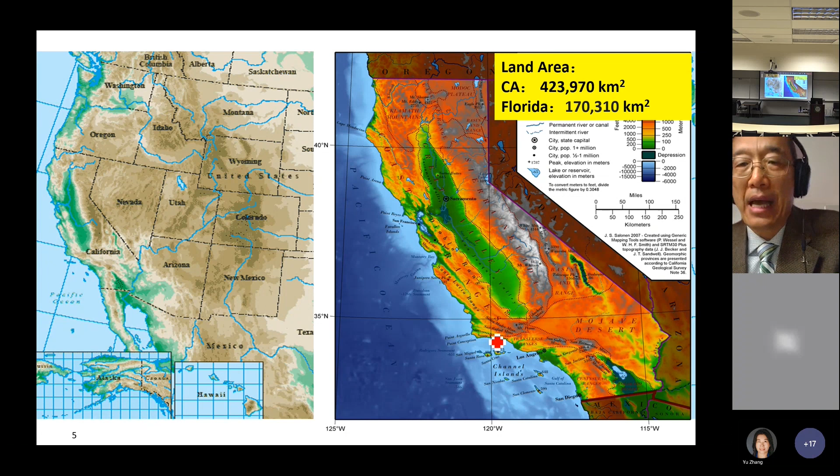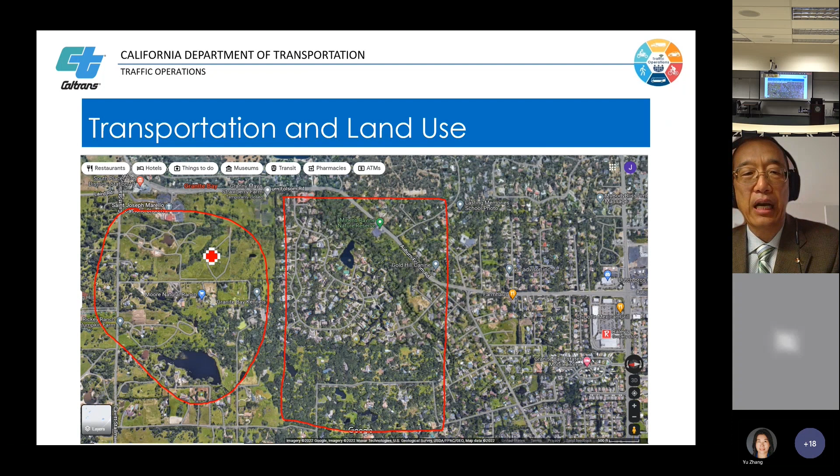So I hope you folks appreciate, because I worked with USF before, that's Professor Kristine Williams, on access management, right? So when you have a denser land use development, you will see the access points along the arterial will be a lot denser than in the low density development. I believe you folks are transportation majors, so you'll have no issue appreciating what has been shown in this picture. And here is a repeat of the low density, and here a repeat of the higher density.

So you see all these different access points, right? See, this one access point now will serve so many houses out there, as compared to the low density development. So this is the land use pattern, and that's where all the traffic got generated, right? So every morning you will see all these households send cars to the alleys and into the local roads, and then to the arterial, to lead to the freeway, isn't it?

So that's just day in, day out, like a pendulum. That's what we are talking about, the origin of all this transportation and transportation issues. That's the land use. So keep that in your mind. And not only the land use pattern, we also talk about the transportation service population.

And in California, over the last 140 years, you will see the population continue to grow all the way to about 40 million in this state. And yes, in recent years, we see some dipping in our total population or the growth rate, right? So the red line is the growth rate or the annual changes. But again, on this same piece of land, if you compare with the 1900s, we are really dealing with a lot of additional mobility needs, right?

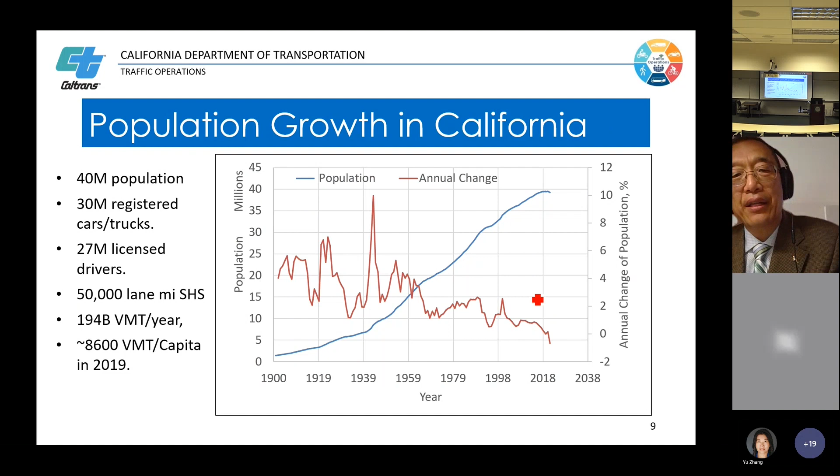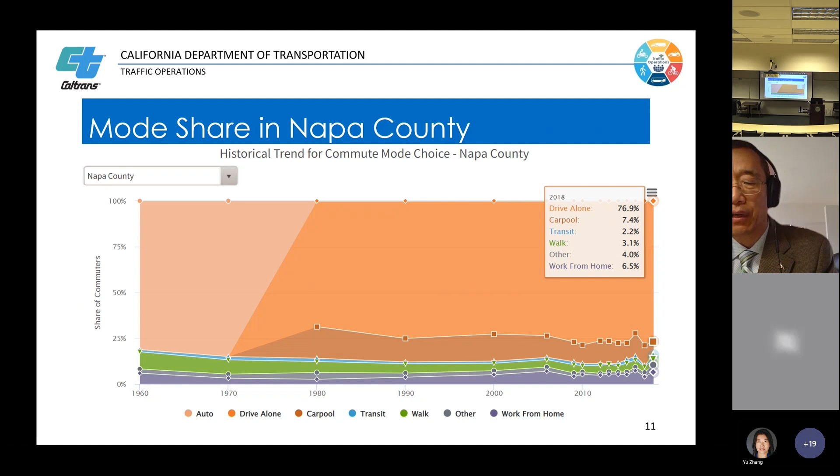Remember, in Napa County, only 2.2% are using transit. So a lot of people depend on the freeway, and that's a common theme for freeways in California. I think it's probably the same in Florida, very much congested, and you see the congestion or the delay continue to grow. This is the chart in California, okay?

Although population grew in the last 20 years by 13%, traffic delay grew by 28%. So all these things are really commonplace for you folks to understand. No issue. I don't think that we have any issue.

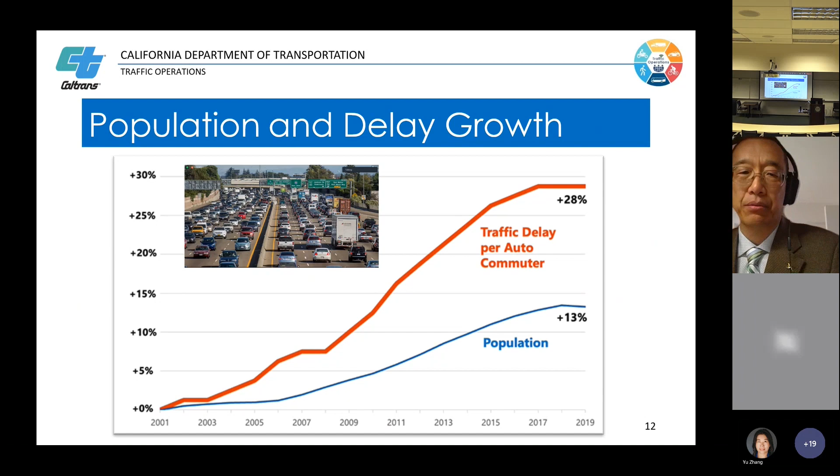So that's the situation. Again, I want to chime in a little bit on the historical perspective. We have tried to deal with the congestion or the delay issue, especially auto delay, by building additional roadway infrastructure. This trend has taken place ever since the 1700s. At that time, you see Junipero Serra, the first Spanish missionary in the California area. At that time, in the 1700s, transportation was walking or wagon, right?

Or animal-drawn carts. But after the automobile came into being, especially after Henry Ford, we have mass production of the Model T cars. All of a sudden, we have seen a lot of additional cars out there because everyone can afford a car, especially in the 1900s, right? And that pushed the infrastructure construction, I say, fever. That is a fever, especially in the 1940s.

And then from 1940 to 1969, this country really ushered in a highway era. I tell you, at that time, in the city of LA, they had a grand plan of putting in freeways every 5 miles in the city grid. So correct me if I got this number wrong, but that is the highway era, especially combined with, after the Second World War, the 1956 Eisenhower interstate system we see today, right? You will see a lot of additional freeways got constructed.

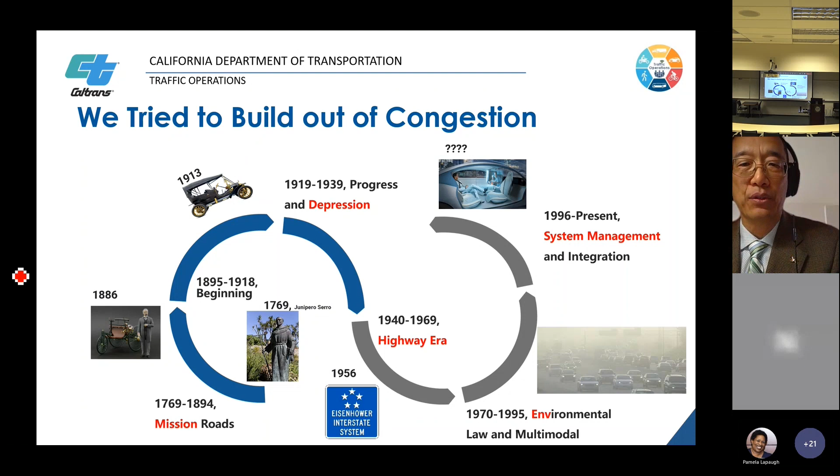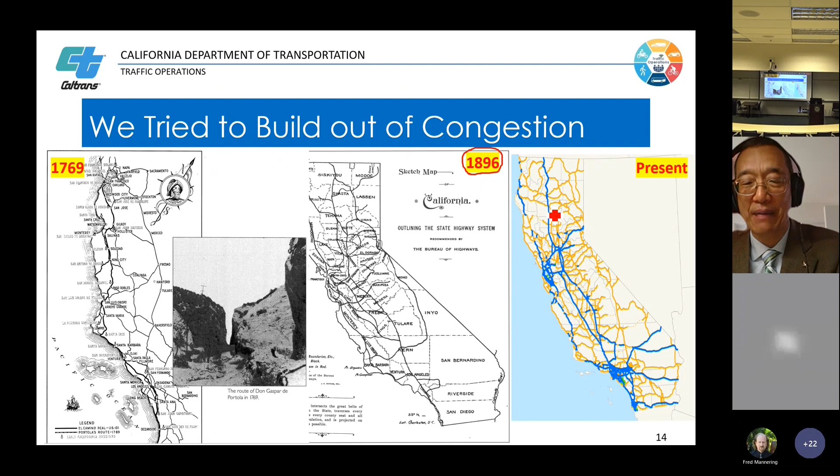And then by 1896, when Caltrans came into being, we started to develop the statewide highway plan. We started to move the freeway to the Central Valley and to the foothills of California, right? And the rightmost picture is today's situation. You see how much we have developed, especially putting in all these freeway systems, like the arterials. So we tried to build out of congestion to satisfy our transportation needs.

However, when you talk about the San Francisco Bay Bridge, I'm not sure how many people have crossed that bridge. At the beginning, in the 1940s, when the bridge first opened to traffic, the top layer was reserved for light rail cars or transit use. It wasn't developed for cars. However, when you travel today, both the lower deck and the upper deck are fully occupied by automobiles. I just didn't see much transit use at all, right?

Yes, we tried to build out of congestion, and we had a good intention at the beginning, to encourage transit or multimodal travel. However, cars took them out because it's...

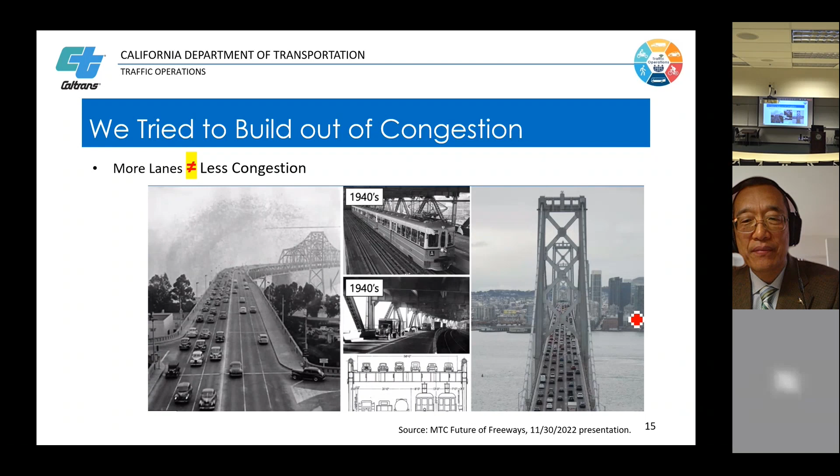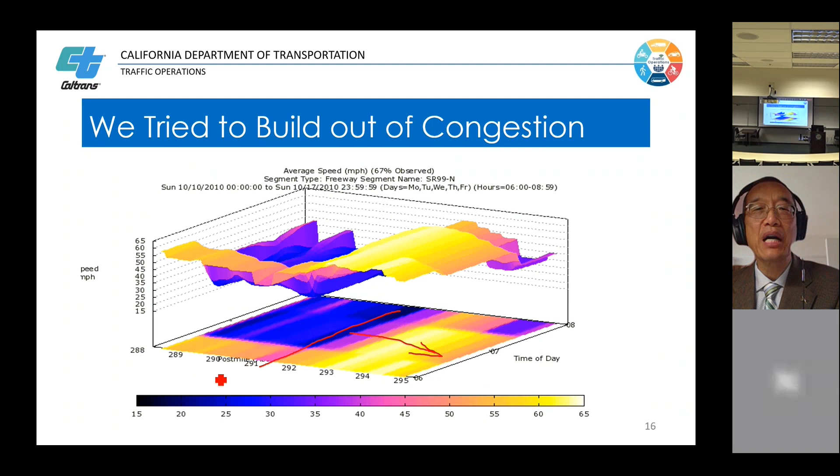So we tried to add an auxiliary lane out there to relieve this bottleneck, and this is what happened after we constructed the aux lane. After we built additional roadway capacity, did we really eliminate the congestion? Again, no. We only managed to push the bottleneck downstream. If you compare these two pictures, we pushed the bottleneck downstream, and that's it. The congestion still remains. So again, we tried to build out of congestion, but I don't think we did.

An additional challenge is climate change. You already learned about the California wildfires and sea level rise. I think Florida suffers from sea level rise too, right? These can also be attributed back to transportation, because transportation gives a lot of emissions, causing GHG and contributing to climate change. So that has been another concern of our transportation community.

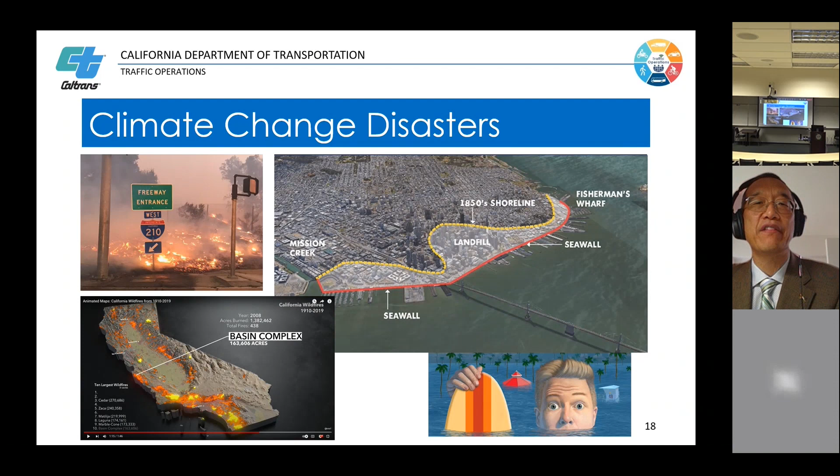And the other side of the story, something new for transportation: previously, we only thought transportation was to make people travel faster, and that's not true. Transportation also has social value. These freeways are wide, big, and grand looking. However, they favor travel by automobile. They favor driving. When you talk about favoritism, you have equity concerns, and that's the social value. And all this freeway construction is also severing our communities, right? You might also be separating farmers from their arable lands.

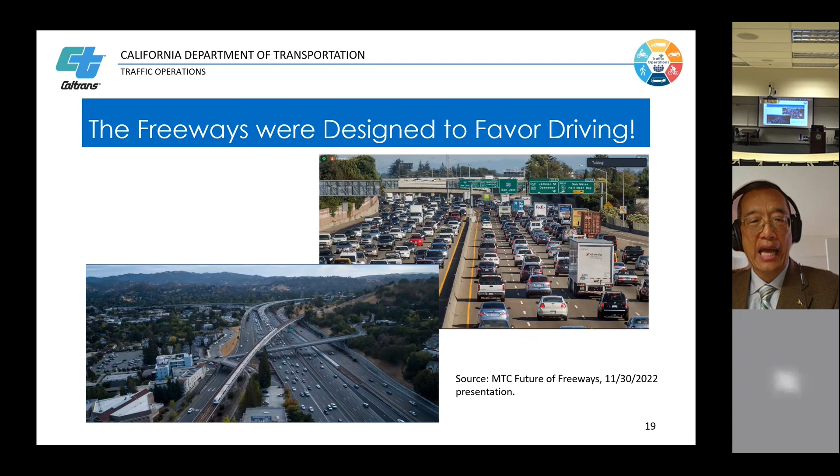Their field, things like that sort. And then this is a picture from the city of Oakland in California. This is not my slides, okay? So I stole it from MTC, Metropolitan Transportation Commission.

When you're thinking about one of our freeways' route choice, this route was selected going through all those red colored areas. Remember, all those red colored areas are really kind of cheaper land. See that all these areas are kind of cheaper lands. And then it happened to be occupied by the poor most of the time. All right. So you will see again and again, transportation site selection has not been as equitable.

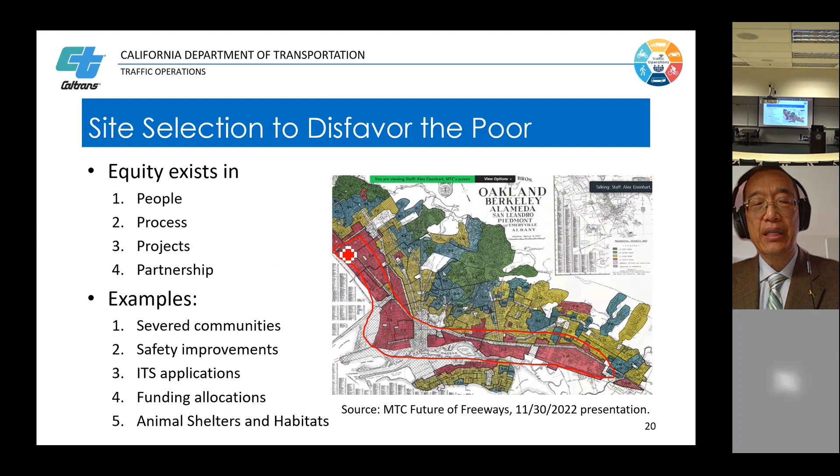Okay. When you talk about equity, when you talk about the transportation social value out there, we need to kind of redevelop. We need to change our practice. Okay, so I do not want to explain to you what equity and inequality really is. I will encourage you folks to really check online, watch YouTube, what equity really is, and why transportation facilities, as of today, are not fully considering all these different community needs, especially the equity needs.

For example, if I want to ride my bicycle, I will feel the freeway system probably is not an equitable investment, right? So I will stop there. But I think in California DOT, we really acknowledge the past. We want to correct now. In all of our facilities and investments, we will consider equity.

I can tell you right now, I'm developing a policy on managed lanes or on HOV lanes, high occupancy vehicle lanes. We are considering specifically the equity issue. We are being required to perform an equity analysis for our investments so that we can prevent any future occurrence of all this inequitable kind of development.

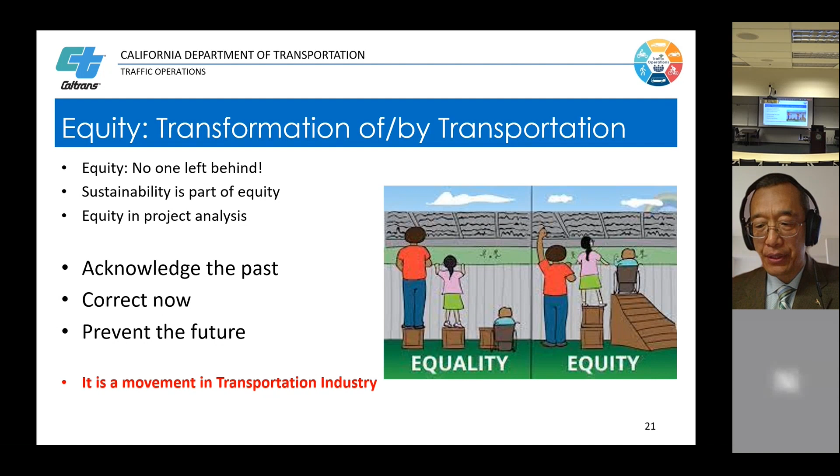Then how about the next steps? We've already seen we have the land use pattern, we have the mode sharing, and we have all these inequity issues out there. What will be the next step? The basic conclusion from us will be, congestion cannot be eliminated. And sometimes congestion might be even a good thing, I tell you. You don't want to build a road with no cars traveling, with no people using it, right?

So congestion cannot be eliminated, especially during the peak time. That's when we design our highway system, right? Remember, you use the 30th hour. We allow for 30 hours of delay out there or exceeding its capacity, right? So it is not designed to have no congestion to begin with. And then experiencing some congestion is okay. We feel it's okay, all right?

And the goal of transportation is really multifaceted. It is about people. It's about equity. It's about quality of life, and then the economy and sustainability. It's not just about moving cars from point A to point B. It is about moving people from point A to point B. That's the difference, all right?

And then the next step, we probably need to think about, are we going to continue to pour more concrete to solve our transportation issue? Or should we start to think about changing people's behavior in trip making? Because when people start trip making, they should have some additional mode choices out there. Can I ride the train? Can I bicycle? Can I even walk to save a solo driving trip, right?

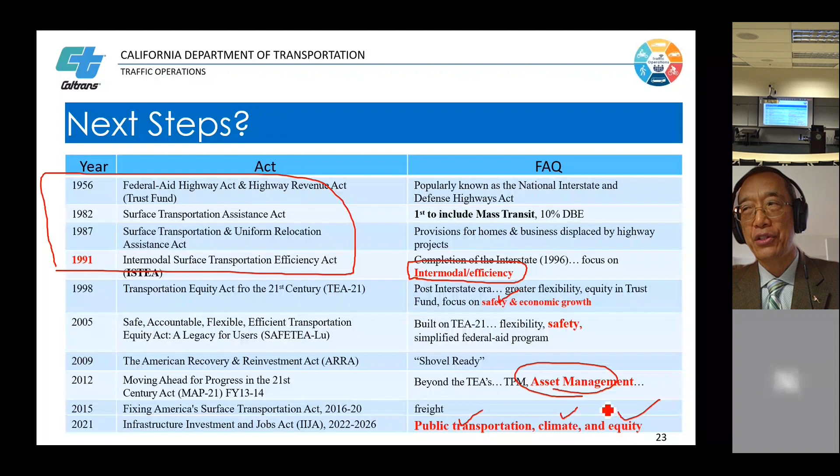So that's the political side, the funding side, the next step. Think about these three or four points and you'll really see what I'm trying to say. That's the change, that's the shift. And we need to change and shift starting from our classroom, probably. Everything from construction to performance, all right?

I think I have used about 33 minutes now. I will try to be quick to talk about the challenges and solutions and what's happening in California, to answer Dr. Lu's focus. Dr. Lu, here is the first challenge and solution. We have the carbon challenge, the environmental concern. And then there's the California solution I'm going to talk about.

Transportation emits about 49 to 50% of all greenhouse gas in California. In California, the solution is threefold. One is the fuel standard change. We made it way stricter for low carbon fuel, things like that, to reduce GHG emissions. We also ushered in the electrification era. Everything we want to electrify.

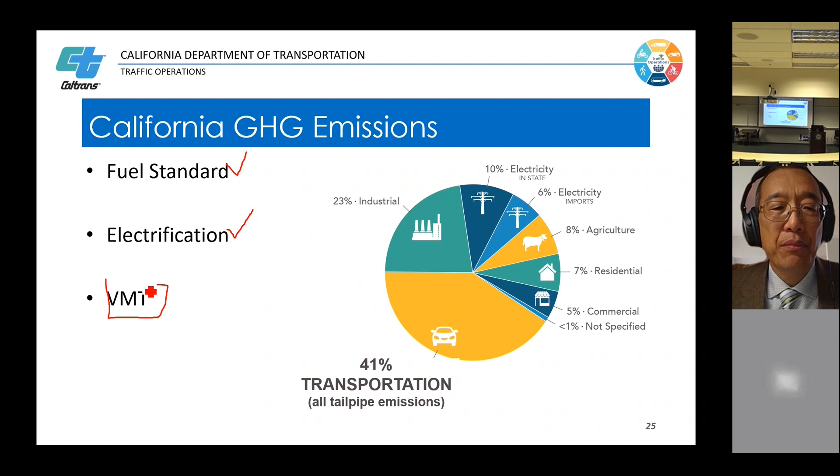And the third piece is vehicle miles traveled reduction, VMT reduction, because to reach California's GHG reduction goal, the first two, electrification and fuel standards, will not be sufficient to live up to the 2035 and 2050 carbon neutrality goals in California. So we must add the third piece, the reduction of vehicle miles traveled by our roadway users. So that's the focus.

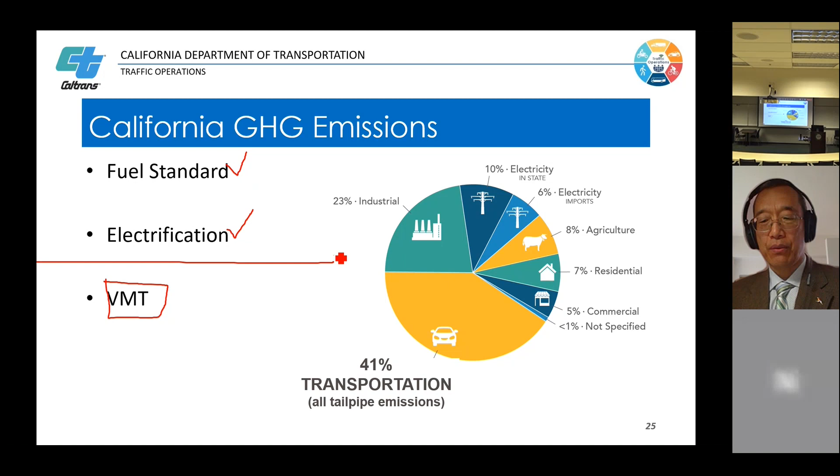I have done a little calculation. Every vehicle mile traveled is worth about 32 cents. It's very, very costly, folks. And every vehicle mile traveled, if you just drive a Toyota Camry, you are going to give out up to 2/10 of a cubic meter of GHG. That's 363 grams. I want you to double verify me; this is my personal calculation. Based on our PeMS system, VMT is costly. That's the message I want to give you all.

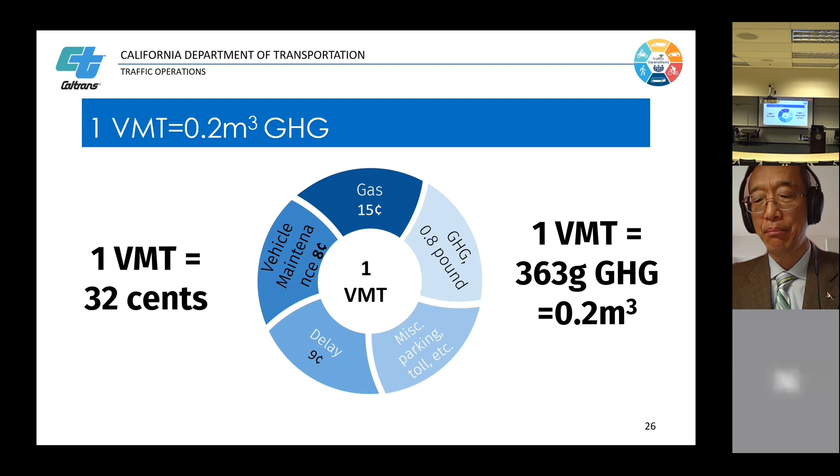And this is the goal of California. You see the black dotted line, that's our goal. And the red line is the California VMT, where we are.

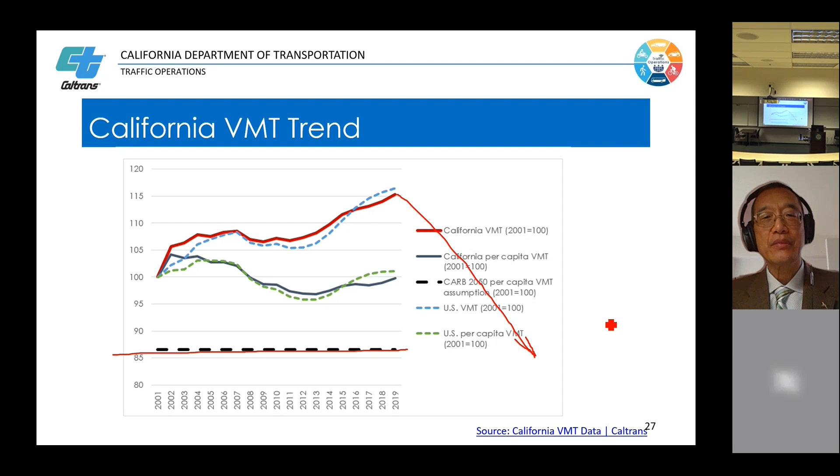And if you're thinking about 2030, 2035 and 2050 to reach this goal here, we still have very much a long way to go to reduce the per capita vehicle miles traveled. Right. So that's our challenge now. That's our challenge. Really, the goal asks a lot.

Then in California, in 2013, we issued Senate Bill 743. Okay, the basic logic is this. On the left-hand side, you folks see what you do during Black Friday. You rush into the store and take advantage of the sale, isn't it? Because the sales season starts, the holiday season starts. Okay, and the same thing happens for transportation.

When you see all this congestion here on the freeway, right? The old way for a DOT to deal with the situation is to project the traffic volume into maybe 2030, and then we start to provide additional facility like the yellow band and the green band, right? So that's what we'll do. We call it predict and provide. We predict the traffic volume growth, and then we provide.

However, after you provide the green band and the yellow band here, you make the freeway wider and bigger and easier for people to travel. You create a situation like the Black Friday situation. Basically, you are offering transportation at a sales price. If you're driving solo, hey, the DOT is going to build more road for me. I'm going to drive, take advantage of the sale, isn't it?

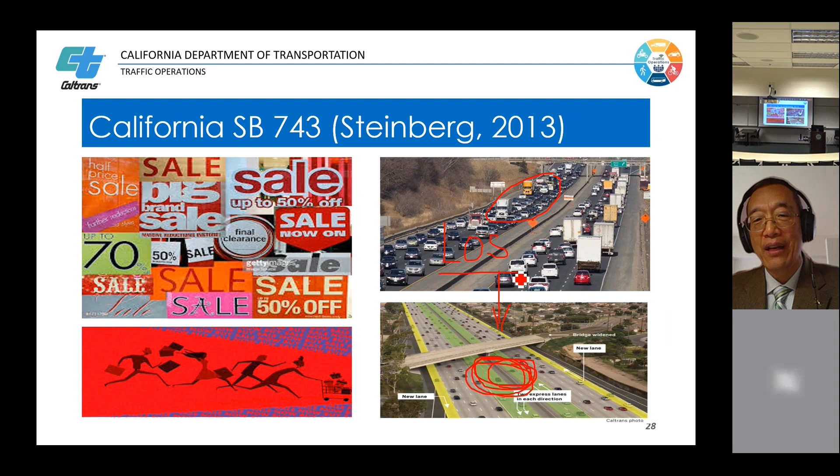So the law says you cannot use that as the basis to expand your system, because this is the evil cycle once you consider the induced piece of the VMT. So it has been shown in this chart as the microeconomic principle here. You do have an elasticity. Once you reduce the travel time, you make your roadway a lot easier to travel, you are going to induce additional demand.

How are we going to implement that law in California? We have a Climate Action Plan for Transportation Infrastructure called CAPTI, an initiative. Basically, with all transportation funding in California, we are going to invest in multimodal, in technology. We are not going to expand our capacity, or we are going to consider SB 743, consider induced travel when we expand our capacity. You have to basically mitigate the additional VMT that will be induced.

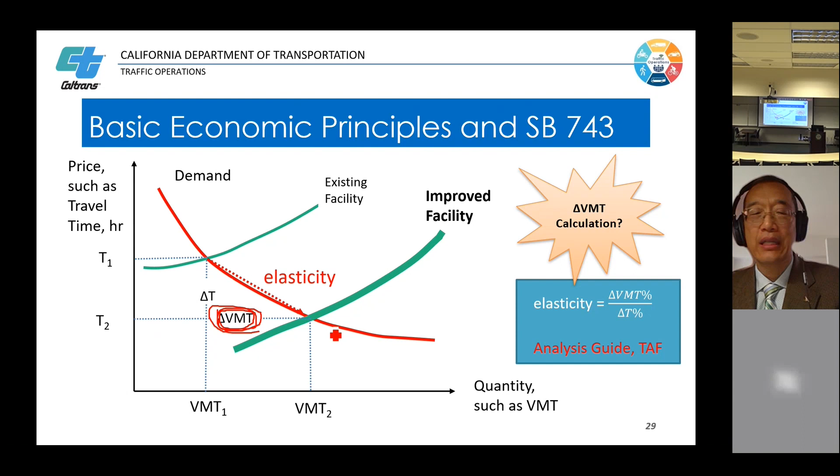Listen to me carefully. You only mitigate the delta VMT piece; the delta VMT will be something additional out there when you expand your freeway system. All right, folks. So that's how we are implementing to reduce the VMT piece, one of the three actions to consider carbon neutralization and to live up to, remember the black dotted line out there, the per capita VMT goal. All right, so this one I already talked about.

So basically, in California, according to our department's commitment and also SB 743, we changed the performance measure for our projects, especially in the environmental clearance process. And this impact is huge. It does carry equity connotations. It does carry sustainability connotations, because we are purposefully investing to consider the planet and sustainability, right? And the performance measure change definitely has a lot of implications for you folks out there developing the analytics, environmental clearance analytics, right?

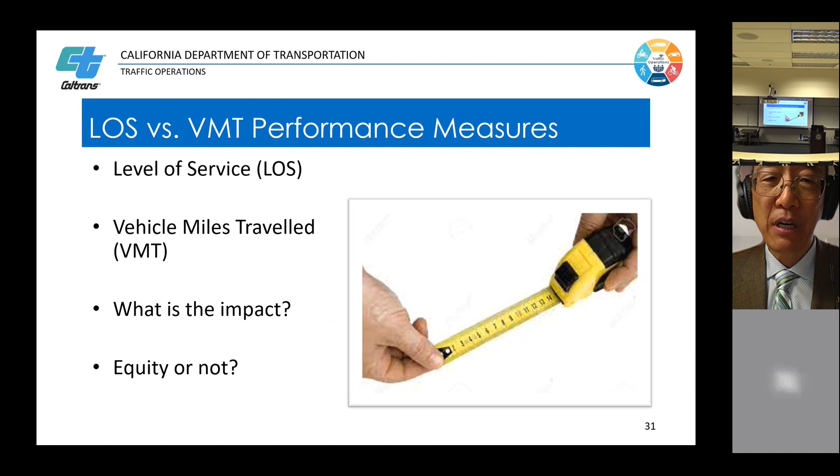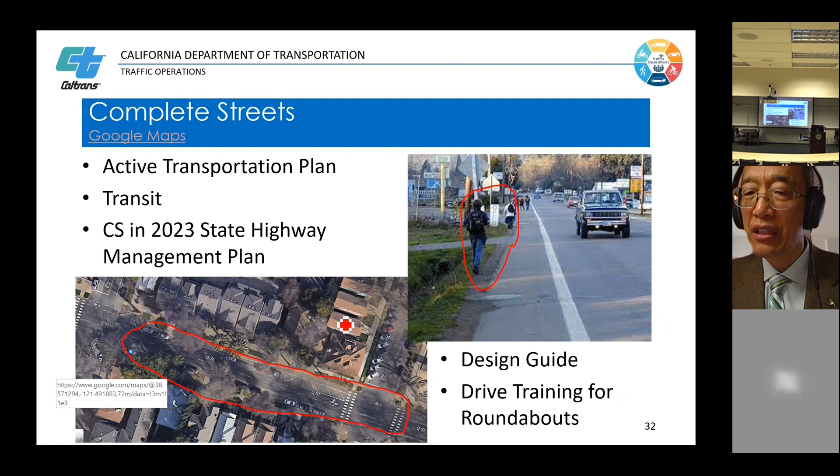Like in DC, I've been to DC last year 4 times. Each and every time I was so impressed by the complete streets development, by the roadway cross section rearrangement, thinking about multimodal use. Okay, bus on shoulder, that's what we're doing also. We talk about managed lanes, right? Managed lanes offer you an additional way of travel. You can pay for that, right? You can carpool to kind of save the empty seats in your car, isn't it? So that's what we're doing.

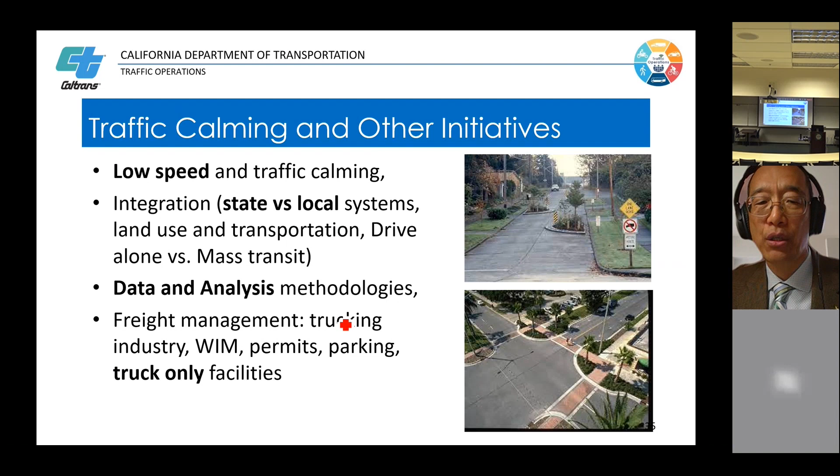We're also doing a lot of traffic calming, thinking about the safety side. Especially in previous years, decades, a lot of the traffic calming didn't happen too much on the state highway, right? Not the case anymore. On the state highway, we're thinking about favoring the different modes. You have to calm down the traffic, reduce vehicle speed to make sure traffic safety goes hand in hand with all these initiatives.

Last year, I had an initiative, I call it, to develop mobility hubs. In fact, these hubs are basically the existing park and ride lots. In California, we have 222 of those. And we feel if we develop those hubs and use those park and ride lots as the joint point between the state and the local system, we can offer a seamless connection for the mode transfer. So we can encourage even bicycle use or pedestrian walking, and connect with the managed lane system especially, right? So this is the mobility hub.

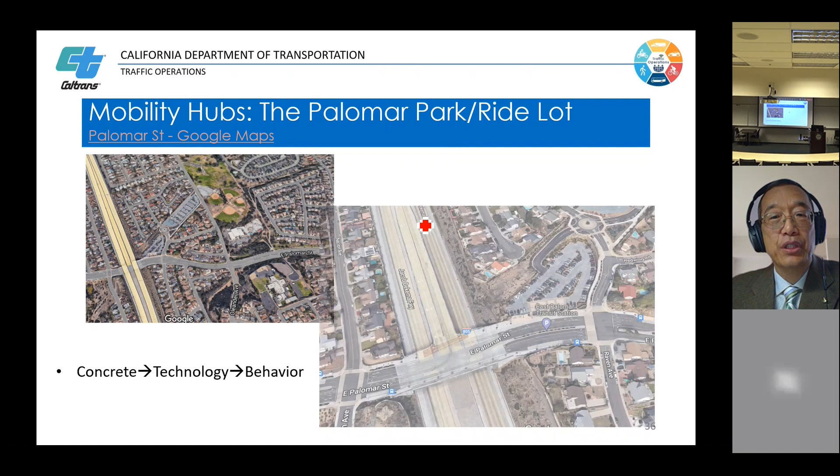I don't have the time to show you, but like I said, I will leave this slide deck with your folks so they can check into our Palomar Park and Ride lot as a sample. That lot really connects with the freeway management system through the local arterial, and then you put in these lots additional new amenities, including electrification, solar panels, EV chargers, bike lockers, ADA parking spaces, and then transit stops or BRT, bus rapid transit stops out there.

So basically, we're trying to use the hub to integrate multimodal at one place and make it a seamless experience to attract additional multimodal travel, to alleviate the solo driving, to improve the transit use. All right, and this mobility hub initiative also re-emphasizes my point: not to pour too much additional concrete, but to focus on people's behavioral change.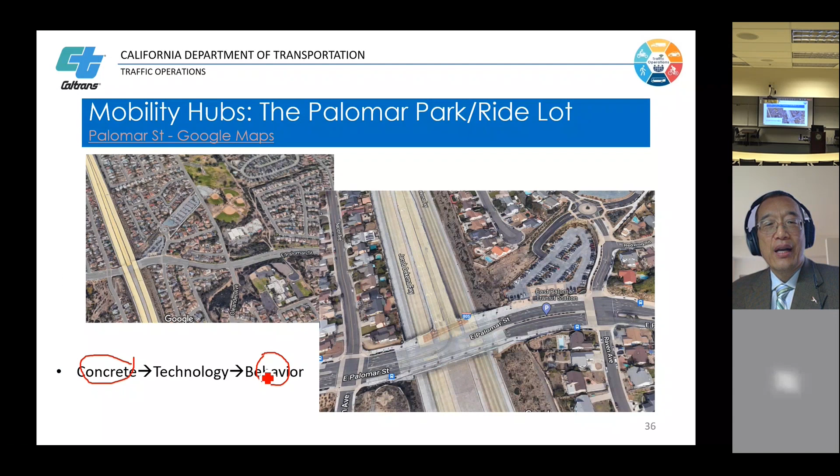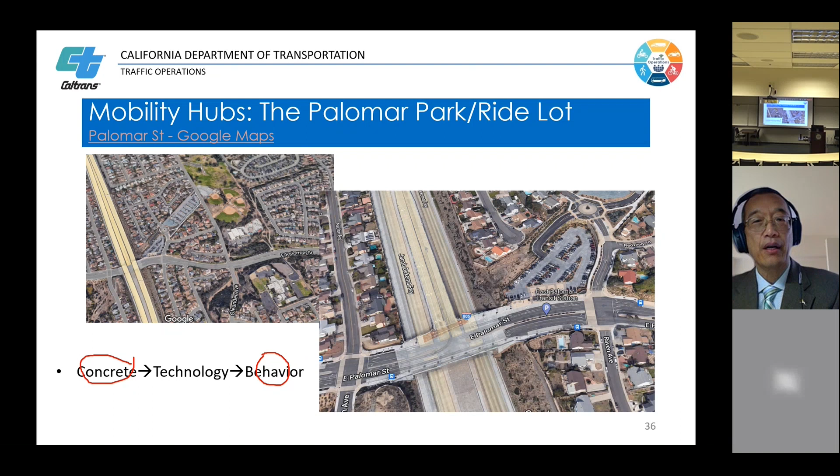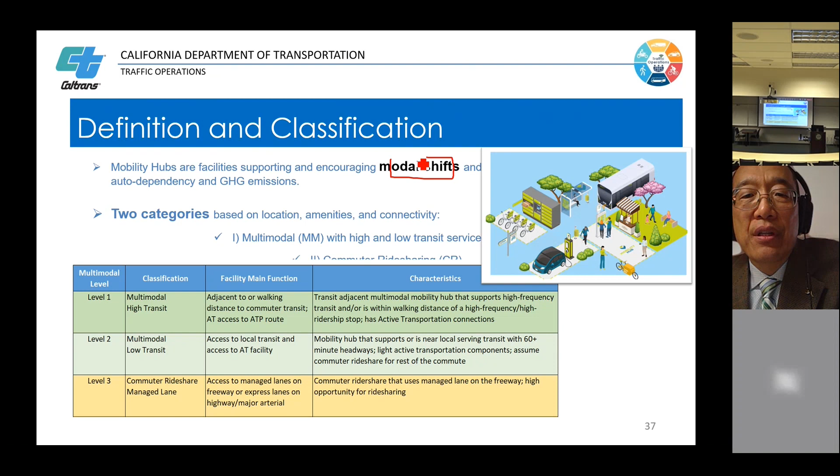So you can see, in the coming next 10 years, we are planning to pilot this type of mobility hub to give a facelift to the existing parking lots. We budgeted about $50 million at this moment. Okay, and I expect this program will continue to grow so that we will really live up to our community's expectations, right? All right, so the mobility hubs, I already talked about it, but this is our definition. The mobility hubs will be encouraging modal shifts, improving the modal share of other modes.

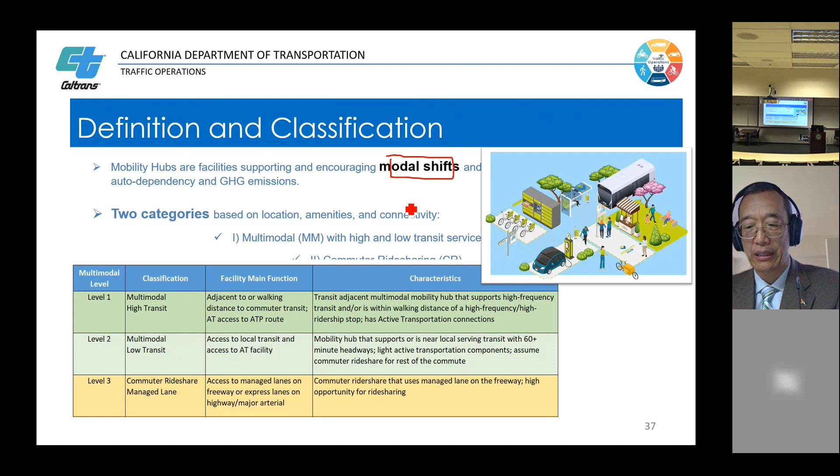So that's our purpose. Definitely we're improving the condition, installing technology, and also adding the connectivity necessary. And we can also implement some curb space management, right? I know USF is really good at all these developments, I've read a bunch of papers on the curb space stuff. So that's the mobility hub stuff.

And that's the carbon. The carbon challenge, we are dealing with it by using the law, SB 743, by changing the environmental clearance process, by implementing complete streets, by investing in mobility hubs, by investing in managed lanes, additional TSMO technology improvements. So that's what we're doing now to reduce VMT, to live up to the carbon neutralization goal in California.

So that's one challenge of the transportation system, right? Your folks have already seen, from solo driving, we want to move to multimodal. And how we're investing in it, starting from the law, the workforce, the process, we are really changing big time across California's Department of Transportation. The next challenge and solution will be intelligence.

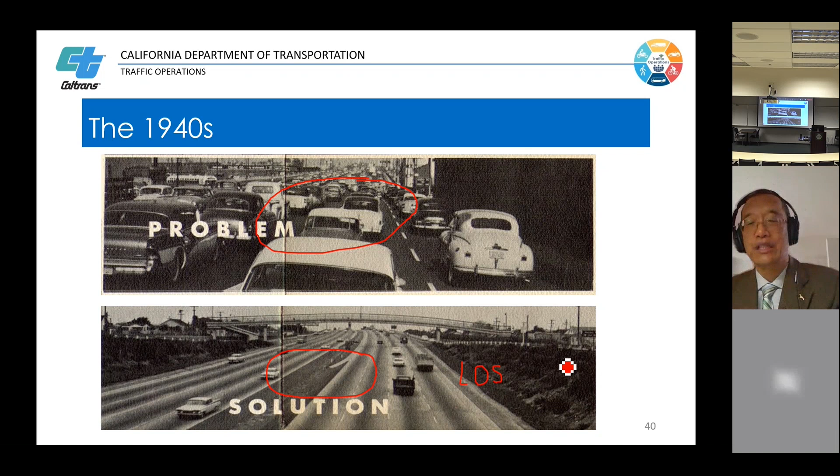I'm heading an office of mobility programs, and I do have a branch that's called TSMO, basically the ITS devices, right? So in the 1940s, again, back to the history, the problem was traffic congestion, isn't it? Traffic congestion. And the solution is what? Build more. And I already talked about it, I'll repeat myself: predict and provide. Predict and provide. You use level of service as your performance measure, right? So that's absolutely the conventional way. In the 1940s, we did business that way.

Until the 1970s, we realized, we have NEPA and then the CEQA environmental law out there. And we are seeing all these smoggy days in the LA area, right? We noticed that transportation really is a big polluter, because every day we are driving VMT. Do you folks remember how many grams per VMT this is going to create? 363 grams, right? And that's 2/10 of a cubic meter of GHGs out there. That's for one vehicle mile you travel.

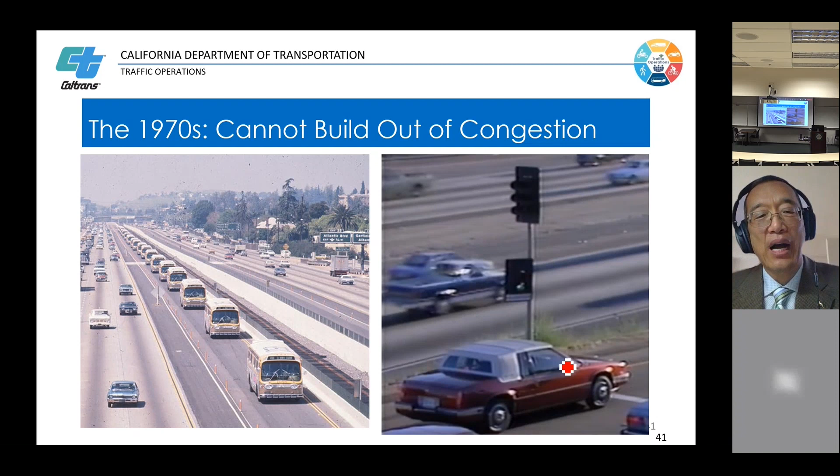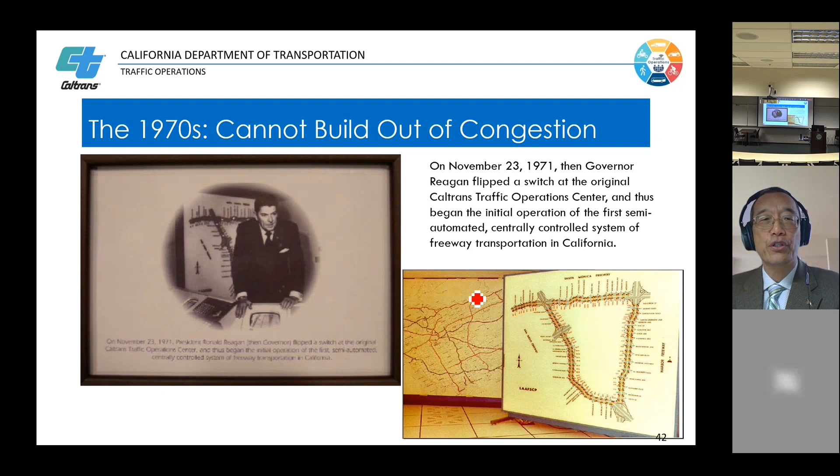And in the 1970s, I'm not sure we realized that yet, but definitely we understand we cannot terminate or eliminate congestion. We cannot build out of congestion. So we have to do something different. That's why all these managed lanes, that's why the ramp metering stuff, that's why all the loop detectors, that's why the TMC, Transportation Management Center, came into being, right? That's Governor Reagan at that time, in 1971, in California, in the LA area, we started the 42 miles transportation control system.

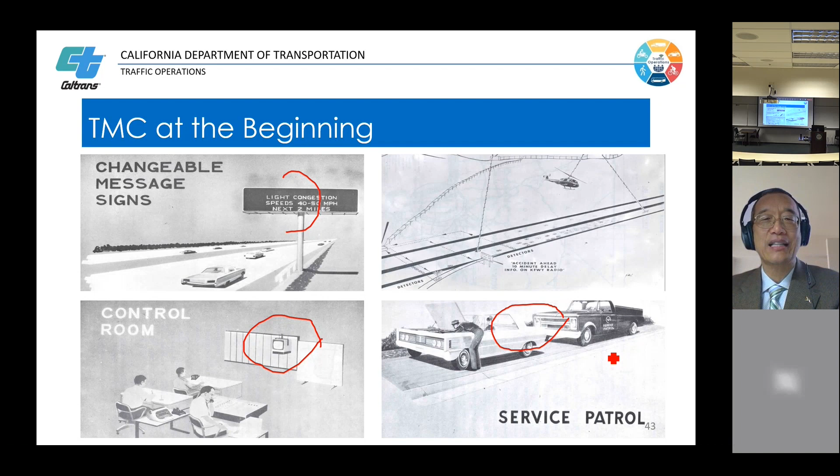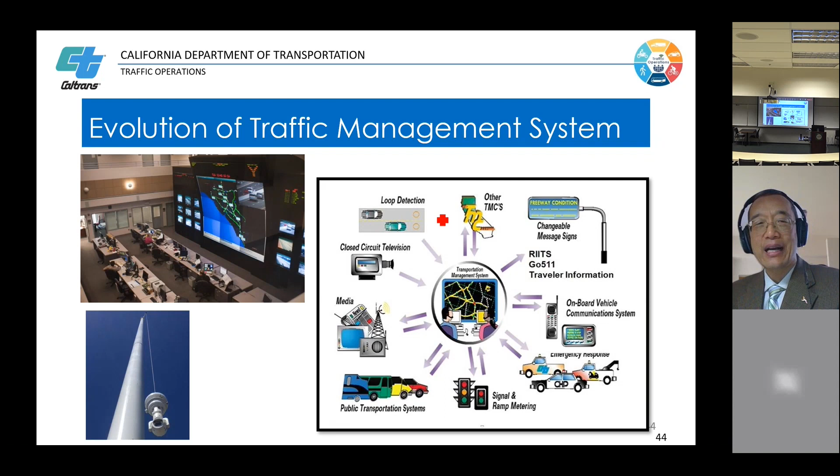And you see it's really kind of deplorable. You see the TMC at that moment, we still have a very small TV out there. You see that small TV, and the signboard we use, and then this is the freeway service patrol or the roadside assistance. That's when we called them technology, right? That's at that time. And today we do have a lot of additional systems implemented, and big TMCs, big CCTV banks. But again, that's the evolution of the system, right?

And then we also had a philosophy to implement technology in the early 2000s. So basically, I joined Caltrans in the year 2000. In the past 20 years, I think our focus has been technology implementation, including incident management, traveler information, say the 511 system, and traffic control. That's our focus. We are thinking about using less and less effort to expand and improve our system through pouring concrete. All right, so that has been the philosophy.

And the future I see for mobility will be utilizing CAV together with smart infrastructure so that we can support maybe mobility as a service, maybe all the behavioral change, maybe all the Ubers and Lyfts, paratransit, all those types of innovative transportation systems, right? Trying to further develop mobility, considering the safety, equity, climate and economic needs out there, right? So that is my personal opinion.

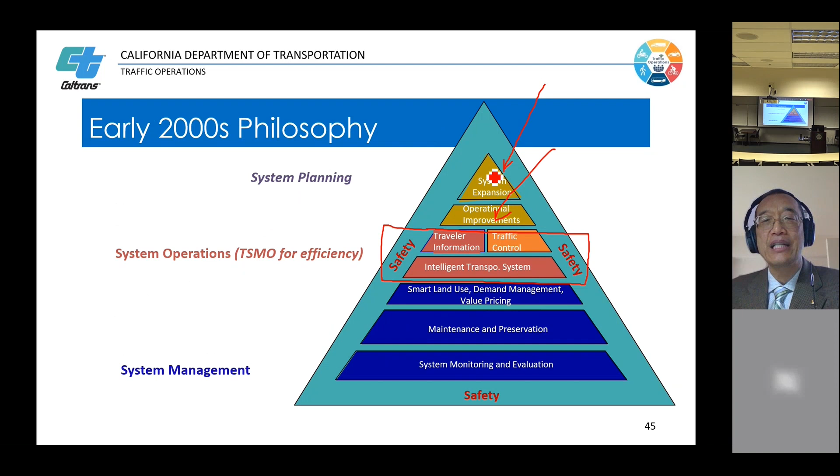And this is a featured slide on our incident management and work zone management Tableau system. So basically, we are utilizing a lot of additional data to provide this type of dashboard to inform our decision process, right? So if you folks need these websites, I'm not sure you can browse them, but if you need any of this type of information, please let me know.

It's a very interesting dashboard system so that we can know whether we are living up to the 90-minute goal of incident clearance in California. You see that? We have a 90-minute goal in California. We still have some incidents out there; we didn't meet that goal yet, right? So that's one. We are definitely exploiting the data side. That's the big data side, right?

And we are also building the broadband middle mile across the state. Following a governor's executive order, we are trying to improve communication everywhere using broadband and fiber for our system to support all these technology needs, the big data needs, right?

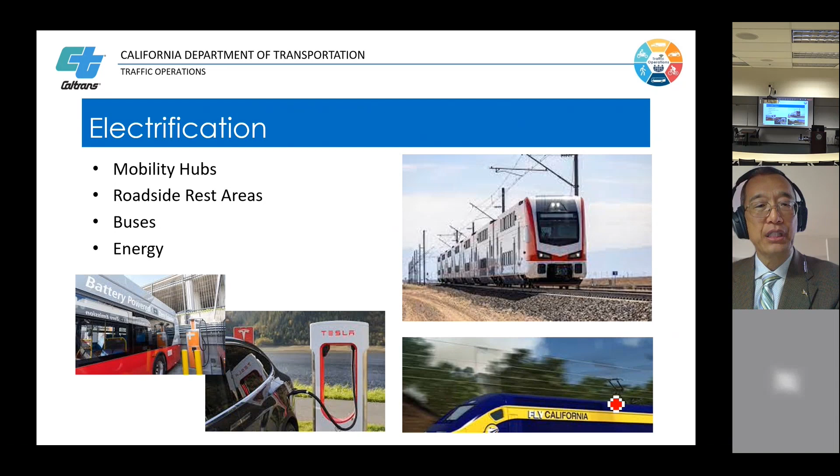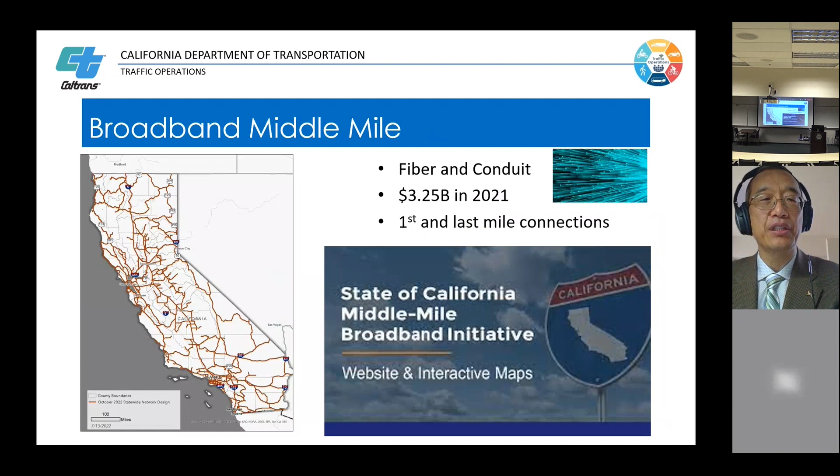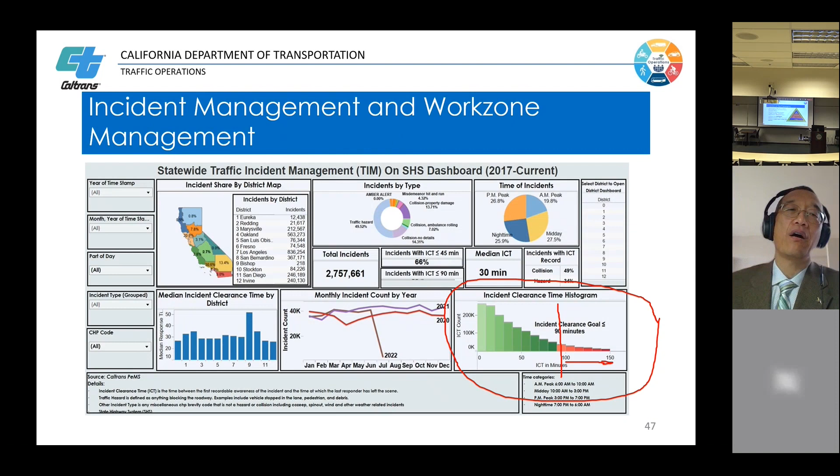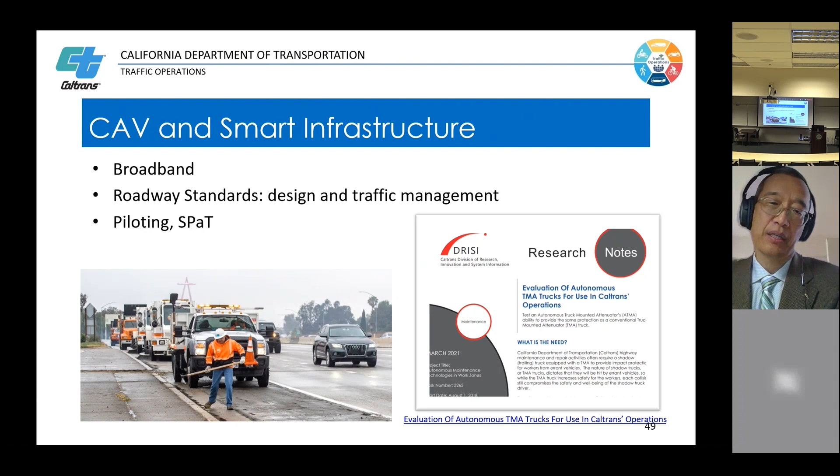So basically these are all the technology and intelligence areas of development. And yes, we have a lot of challenges, but we are implementing that, especially through the TSMO process. So folks, TSMO, Transportation System Management and Operations: we are trying to exploit our existing facilities for more productivity, to transport more, and to consider multimodal. We allow buses to run on shoulders, things like that. So that's the technology piece.

The funding piece: we have always been short on funding, right? You see the gas tax in California: in 1923 we only charged 2 cents per gallon, and now we charge big money, right? About 18.4 cents on the federal side, 50-something cents for the state. So we are a very costly state in terms of gas, and the gas tax is really, really high in California.

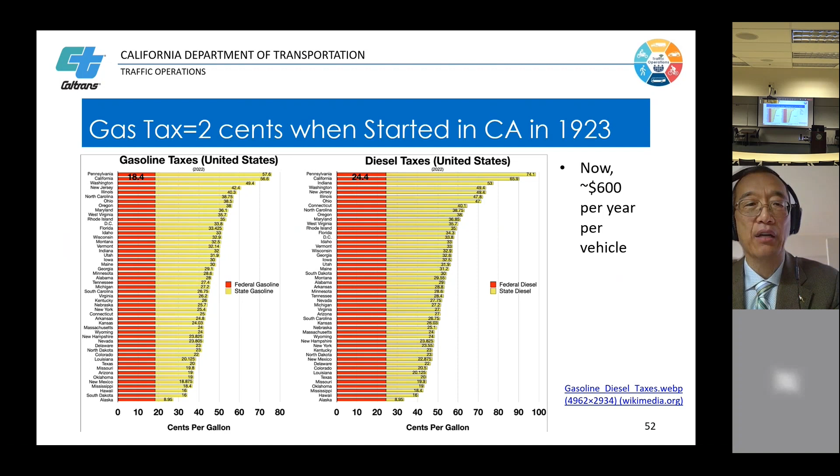But with all this electrification, those cars do not pay gas tax anymore, right? Yes, they pay additional registration fees. But we see the shortfall of the excise tax revenue. And when our facilities continue to deteriorate, with all these new initiatives, you see a big shortfall in investment. Luckily, our local agencies continue to put in their sales tax to invest together with the state to improve our transportation system, right?

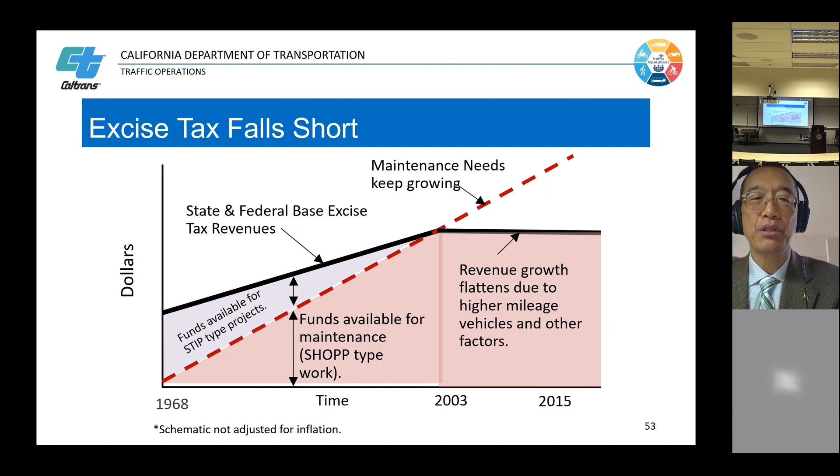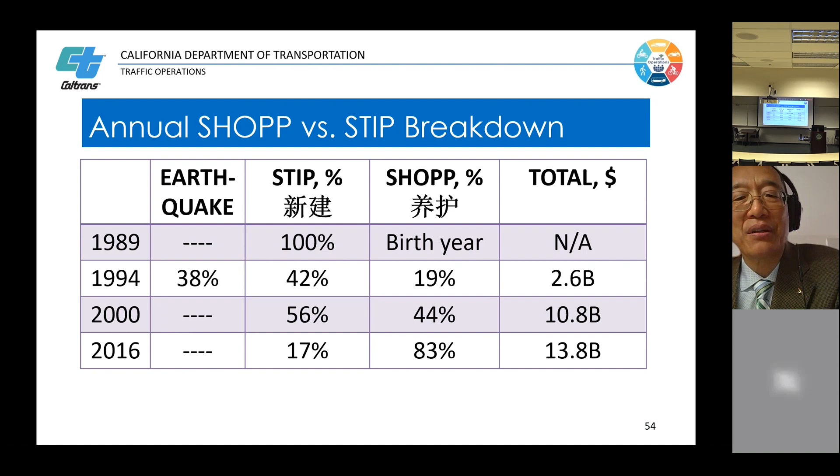That's the shortfall. And as I already talked about, when you're thinking about the new and you have to upkeep the old, the existing, we definitely see a major shortfall of our investment. And we really need to develop new strategies to invest in this existing transportation system.

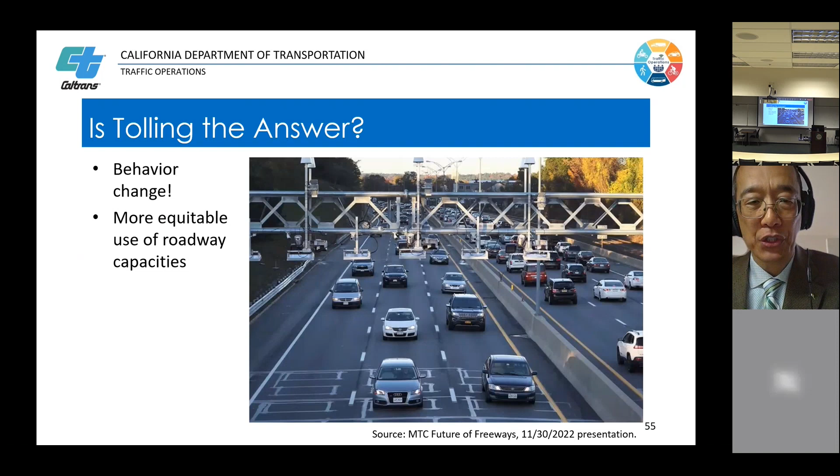So my question for you folks is: is tolling the answer for the future? Can we toll per mile, per VMT driven? Can we toll per car? Can we toll per capita? How do we toll them? Will people accept it? That's really the key to developing a steady stream of transportation funding to live up to all these new performance measures, new goals, equity, all those types of things, right?

One more minute, and then it will be you. That will be the workforce. With all these changes, all these challenges, all this evolution and probably even revolution in the industry, how will you adapt to it? That's the workforce. In Caltrans, I tell you, 60% of our workforce is over 50-something years old, especially the managers, all right?

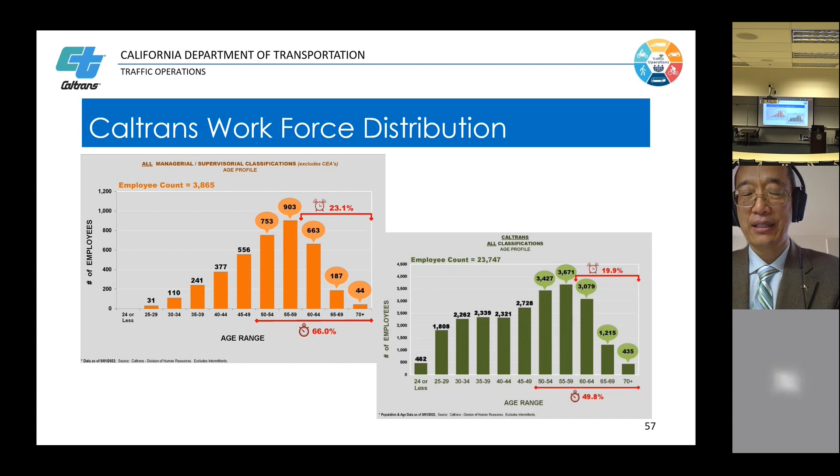And then how you can prepare yourself from a student to an engineer. I really want you folks to not just think about the concrete, but think about trip making behavior, think about multimodal, think about how transportation has social value, it's a social responsibility. No matter if you're in the area of infrastructure development, land use development, or multimodal technology development, you need to think about the social and equity values.